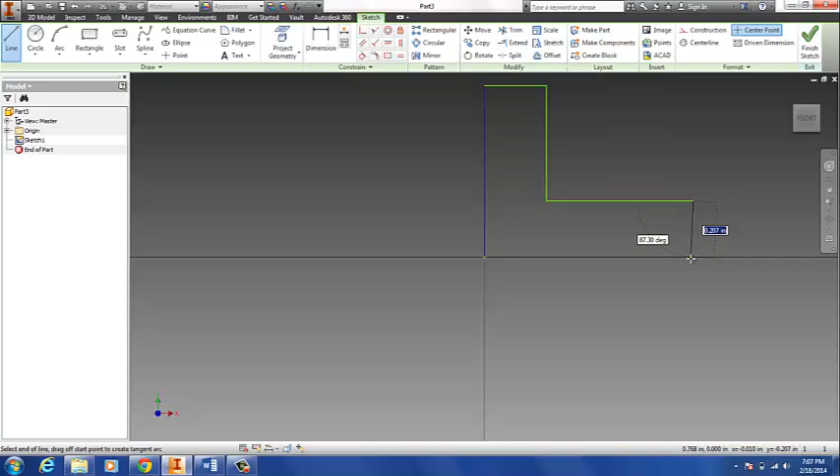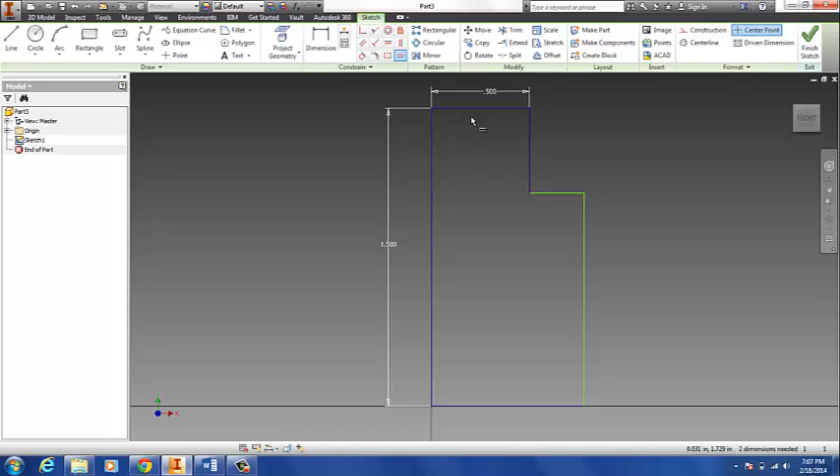So 1.5, and then we'll use the equal constraint. I want this line to be equal to this line, and I want this to be equal to that. All right, and that looks like the shape we're looking for.

We're going to go ahead and finish the sketch and extrude. We're going to extrude to 1.5 inches.

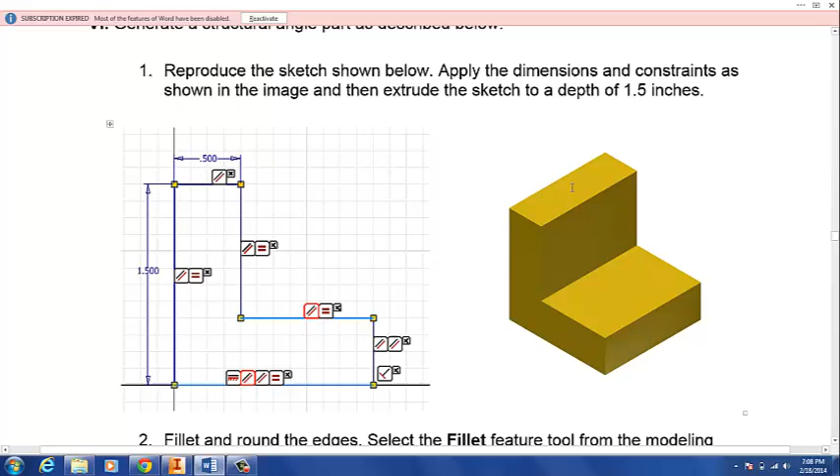All right, so now we're going to put the fillets on the edges. It wants us to do this at 0.25. We're going to fillet these two edges, and technically this is called a round since it's on the inside, but it uses the same tool.

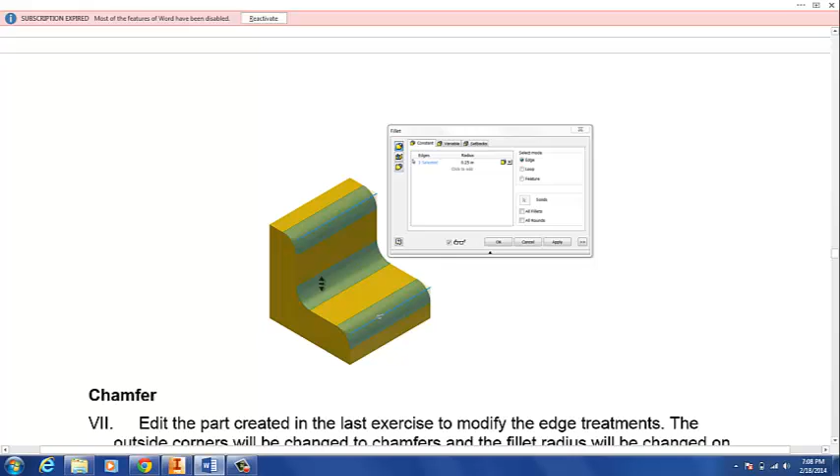So we'll select fillet, 0.25. Now I'm going to do those two edges first, then I'm going to come back and do this edge, just because I know later on we're going to delete the previous fillets, but we'll keep this one. So it'll make our life a little bit easier down the road.

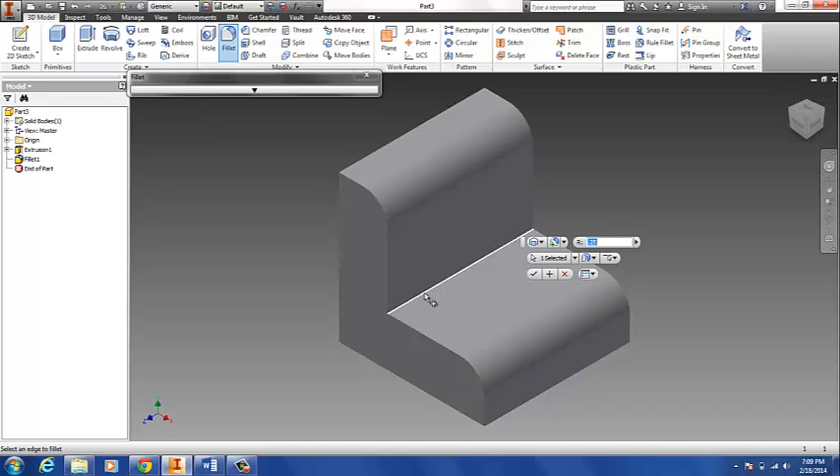Okay, and that's it for the fillet practice. Let's just give it that gold color. Let's do a save as, call it fillet.

Okay, and now the next instructions are we're going to apply chamfers on this top edge and this bottom edge. All right, so we want to remove the fillets first, so that's why we saved it rather than have to make this whole thing over again. Since we've saved it, we can now just edit this.

So we're going to come over here, that first fillet we did, we're going to delete. And that was why we wanted to do this fillet separate, so that we could delete those two without changing that one.

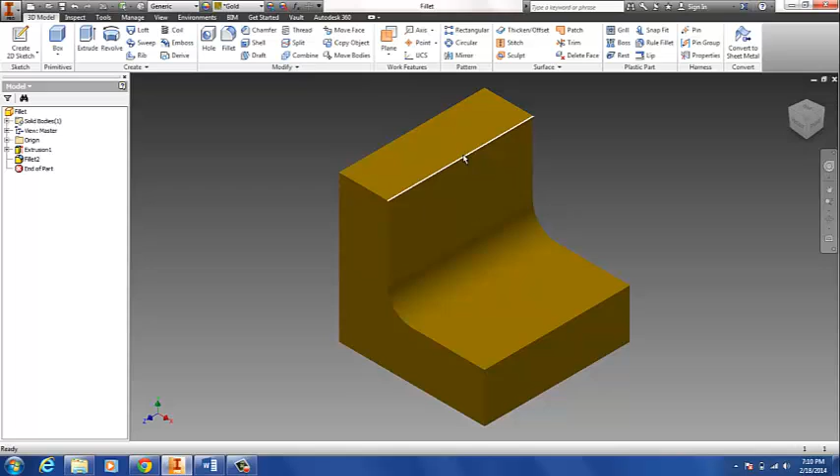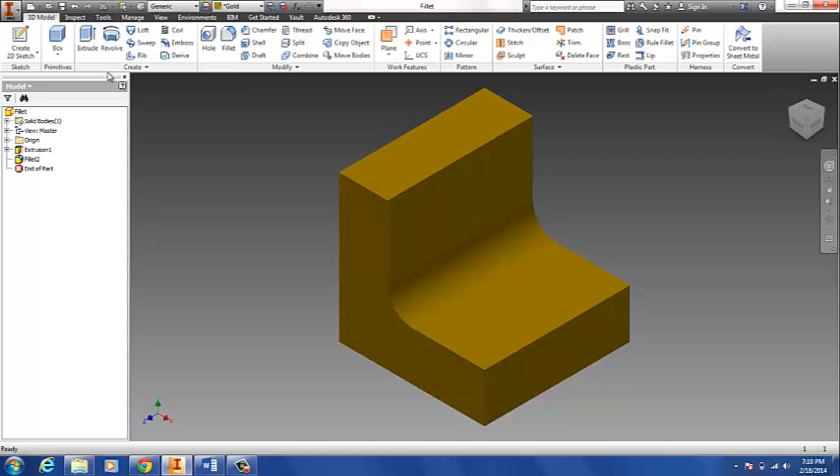Okay, so we're going to apply these two chamfers here. The first chamfer on top is a 45-degree chamfer with a distance of 0.125. So I'm going to select chamfer. I'm going to look at my different options here. This one is just based on distance.

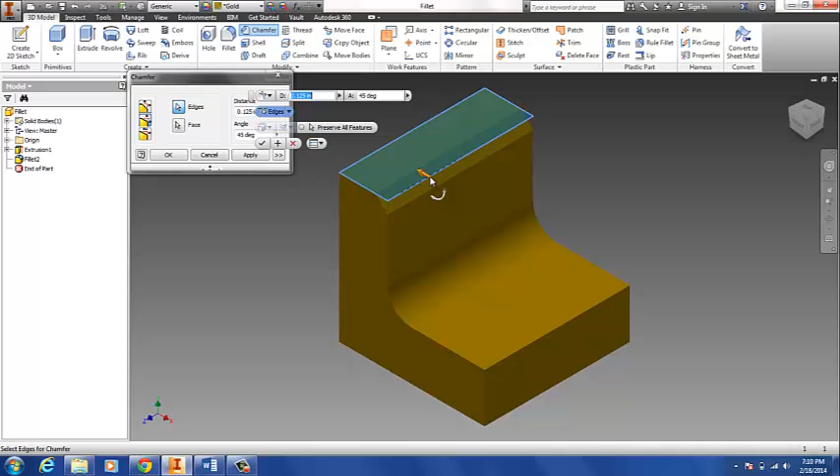The second one gives me an angle. Now it's 45 degrees, so it'll do the same thing as this one, but I could change this angle to something different. So the first thing I'm going to do is choose a face. And again, because it's 45 degrees, it doesn't matter which face I choose. We'll select that one, and we're going to select our edge right here, and we'll go ahead and apply that.

Okay, the next one, we're going to apply a chamfer with two different distances, 0.25 vertically and 0.375 horizontally. So the third option allows us to do the two distances. I'm never sure which way is which, so we want to go 0.375 horizontal, 0.25 vertical.

All right, so I can see that 0.375 was changed the vertical direction. So this one is the vertical. I'm going to do 0.25 there and 0.375 here.

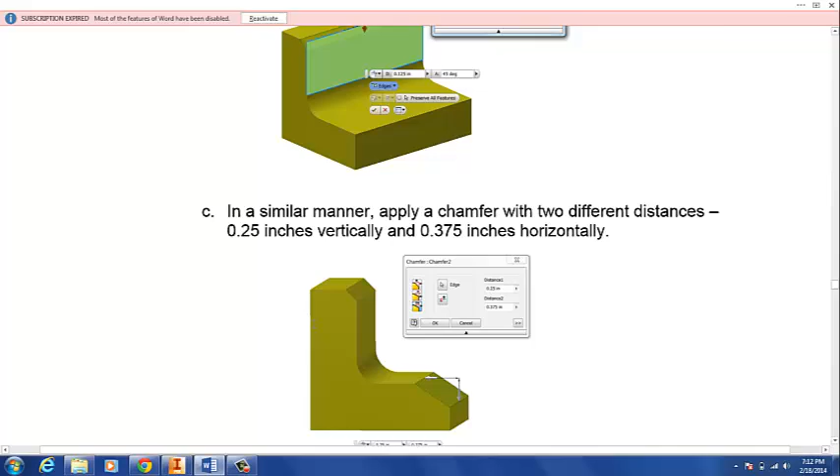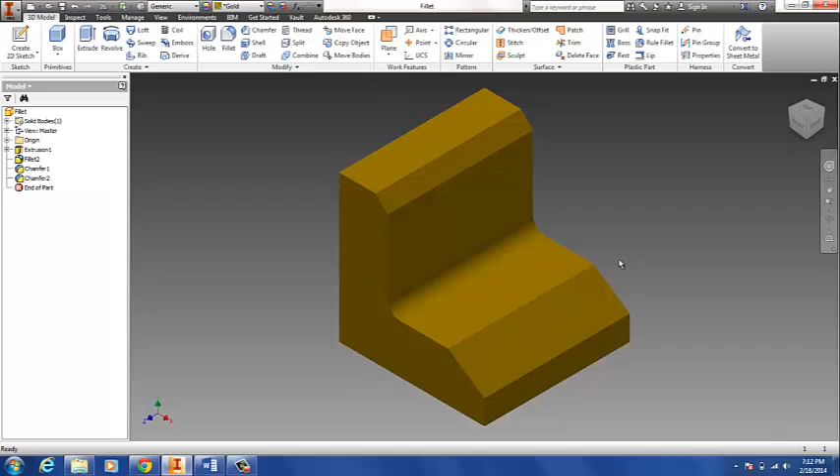All right, and then the last step it says is to edit the fillet radius we did before this round here to a 0.125. I'm going to go back to where we did the fillet, right click, edit feature. Instead of 0.25, we'll make it 0.125, so it becomes a little bit smaller. All right, that one's done.

I'm going to do a save as, so I don't save it over the previous one. And we'll call that chamfer. And we're all done with that.